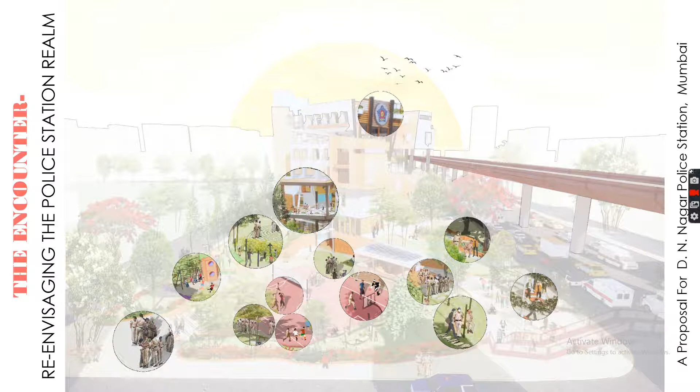The topic takes up this cause of the current plight of the police stations of our city, to study what it is and see possibilities of how it could be made better.

As for the police, we have all seen them. The question lies as to whether we've ever noticed them. They're doing duties in the scorching heat of the sun. They're managing festivals almost every year away from their families, which when we celebrate as holidays, they're patrolling around even through the night, all for our safety. And all of this happens for us, for the community, done invisibly.

The workspaces present for the police are very incompetent. Thoughtful design has the power to make a person feel respected and seen. Hence, the design of a police station can actually be a means to give back to the police for the effort they put in. It could be a means to take the police station forward from simply being a redundant space where they work from.

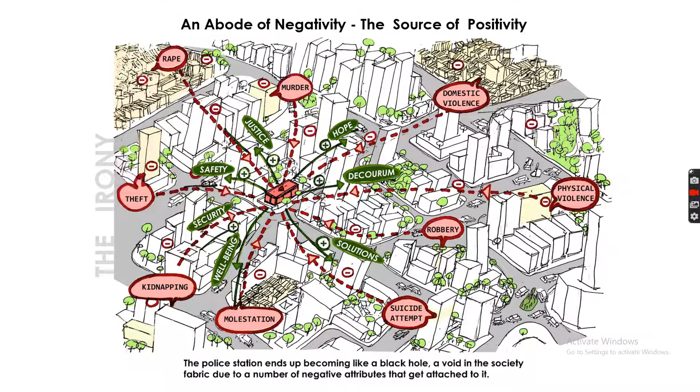The police station is the most important part of policing, as it is the intermediate between the police and the people. It is the formal connect. It is the personification of the police to the city. It becomes our go-to place during any times of negative happenings, be it theft, robbery, kidnapping, rape, etc. And in return, what the police do is give back to society in the form of hope, safety and security.

In this process of actually giving back positivity, the entire environment in and around the police station ends up having a very negative and critical vibe because of sights of despair, vulnerability, disturbing sights in the form of arguments and verbal duels, serious discussions, and the overall tense, silent atmosphere that exists there. It makes it quite ironic, as for a body which is supposed to be the symbol of positivity, it itself has an environment of this sort.

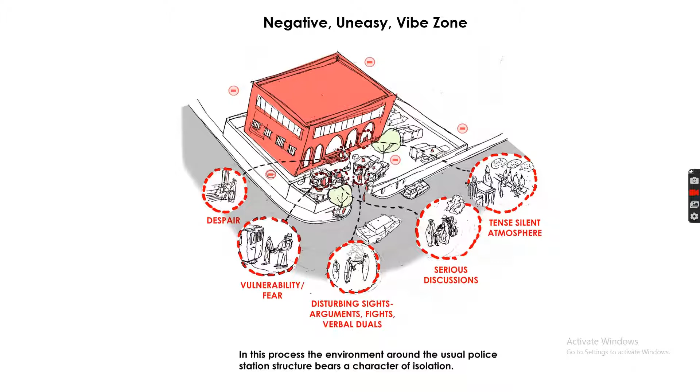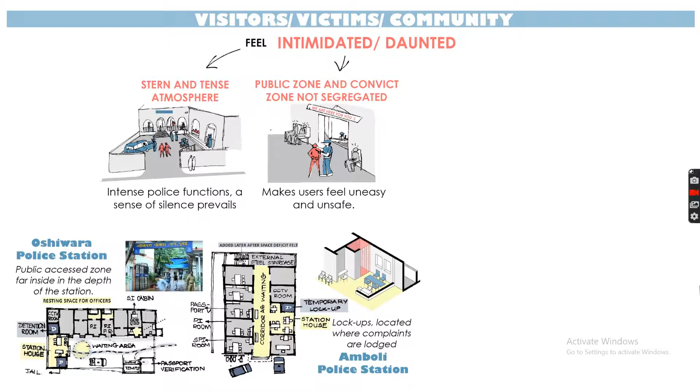The entire research was done studying the environment of a police station with respect to its two key users, the visitors and the police persons themselves. With respect to the visitors, it was observed how the stern and tense atmosphere, along with the non-segregation of public zones from convict zones, and even the visual opaqueness that most police stations had, made the entire experience of visiting the police station highly intimidating.

An example of this noticed in police stations would be the Oshiwara station, where the station house, the most public part of the station where complaints are lodged, was actually located deep into the depth of the police station, involving a person having to pass through serious functions, eventually leading to a space you call public in the midst of something very private.

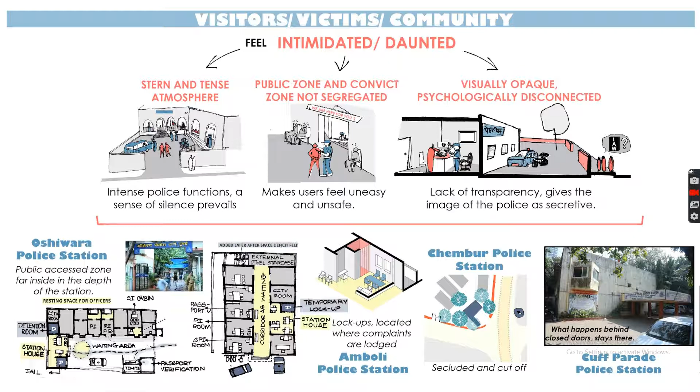Coming to Amboli police station, the station house itself had a lockup located for convicts, which made the entire vibe of the space very uncomfortable for a person coming in. With respect to Chembur police station, Cuff Parade police station, and almost every other police station in Mumbai, the debarring compound walls and blank facades make a person feel psychologically disconnected from the outside, creating discomfort and a feeling of unsafety.

With respect to the police, one undeniable aspect of their lifestyle is work stress. Mumbai police themselves have been found to have many officers falling prey to heart ailments because of the amount of stress, all of which comes down to the amount of crime they witness almost on a daily basis.

They interact with mentally unsound people and need counseling themselves most of the time. There is a lack of societal connect, predefined notions people have about the police, and too much work pressure, where the workforce is disproportionate to the people they cater to. There is unsatisfactory pay and sparse family time, all of which takes a toll on their health, and eventually the workspace doesn't compensate for it.

You have police stations like DN Nagar and Shivaji Nagar actually working from residential buildings. And it comes down to why—why are police stations in Mumbai existing the way they are like this?

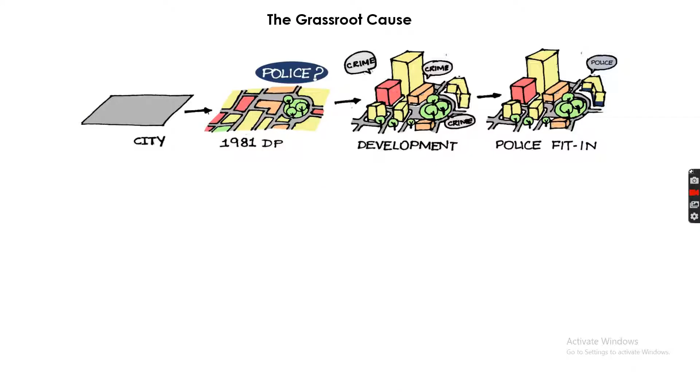The grassroots cause of this comes down to the entire development of our city over the years, especially the Development Plan of 1981, which did not strategically plan out police stations, resulting in police stations having to creep into the existing fabric once it was formed and fit in wherever space was available.

Even the aspect of slums being an undeniable part of Mumbai plays an important role. They became the birthplace of crime on the outskirts of the city, until our city grew around them. Now our slums are within the city, and they became an integral part of it, so the police now have to work to eradicate crime from a problem created years back. If the very formation of it could have been avoided, it could have been a great boon to reducing crime in the city.

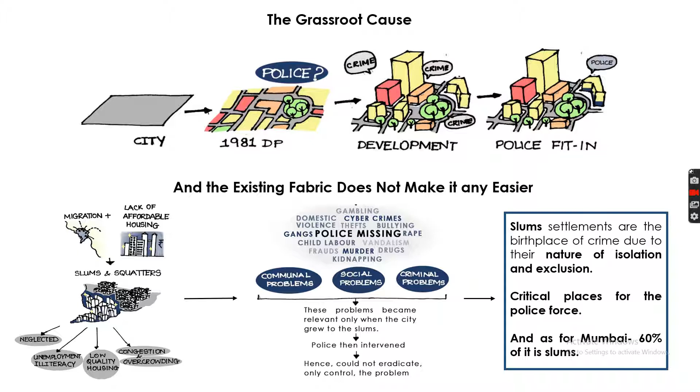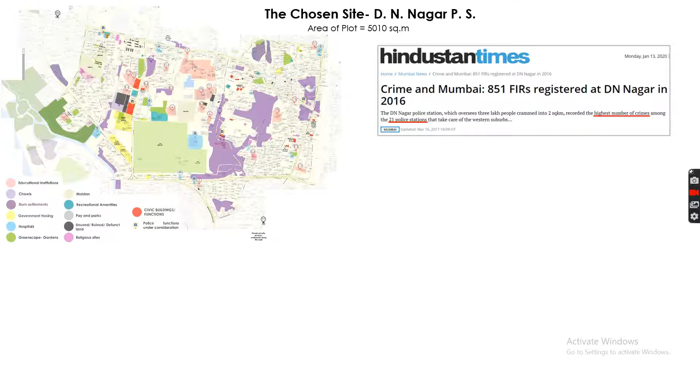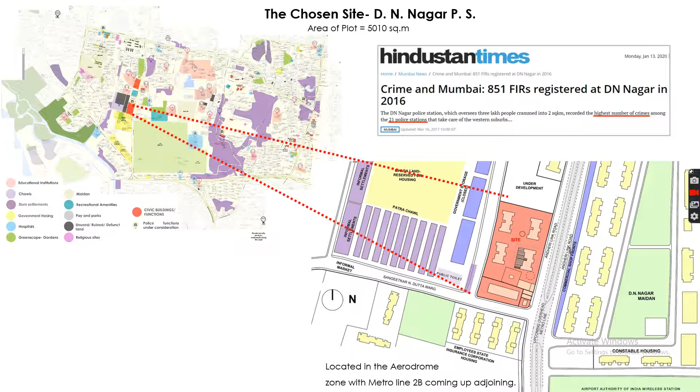So the site chosen for this is DN Nagar police station. It was recorded to have the highest crime rate in the western suburbs. The station is ideally located, with the Andheri link road adjoining it, connecting to two other main arterial roads on the north and south, which connects the entire precinct further. The entire zone around the police station is mainly residential.

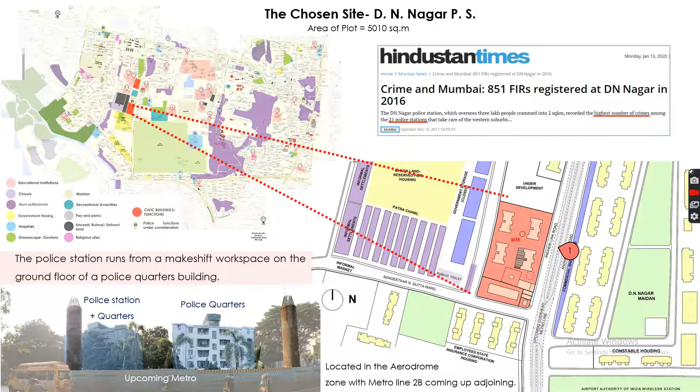The main reason for choosing this station as a site is the fact that it runs from the ground floor of the police quarters building. What results is that the police and the people living in the building share the same compound, the same building, and even the same circulation corridors.

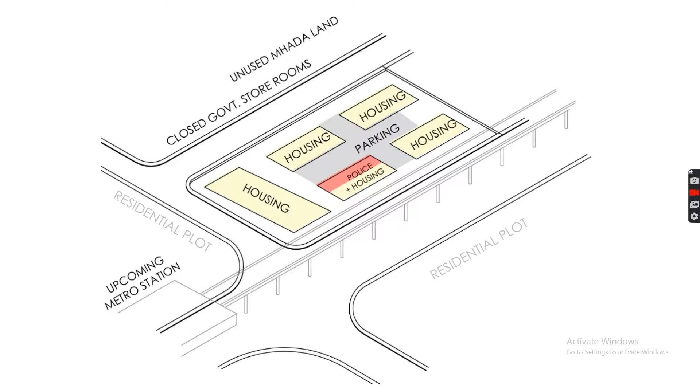There are insufficient spaces for working, and storage comes in wherever possible. All in all, the entire environment of the police station is very dull and mundane, again having an impact both on the police and the people coming in.

Hence, the main intent of the proposal is to meet the needs of the two key users—the people and the police. With respect to the police, it is to ensure better physical and mental health through the work environment, which will eventually result in better work output. With respect to the people, it is to make the entire precinct have an unintimidating vibe.

So now, a person coming in doesn't have to feel scared. This would eventually help better the trust equation between the people and the police, improve the rapport, and all of this together would lead to better policing. And better policing leads to nothing but a safer society.

A very important question which my thesis poses at this point is, what would a safe society be? Wouldn't it be where crime is low? And how can crime be low is the question. It would actually be when crime is eradicated rather than solved once it has been committed.

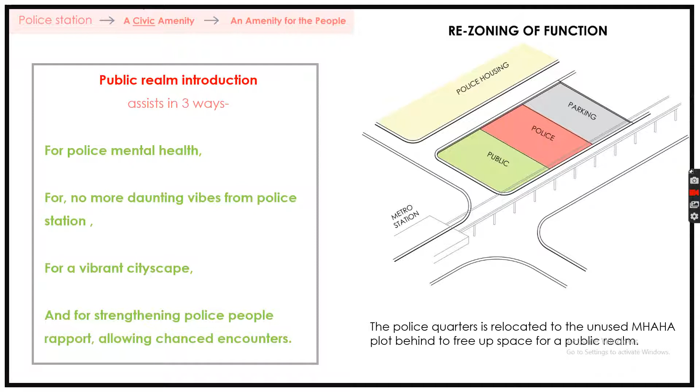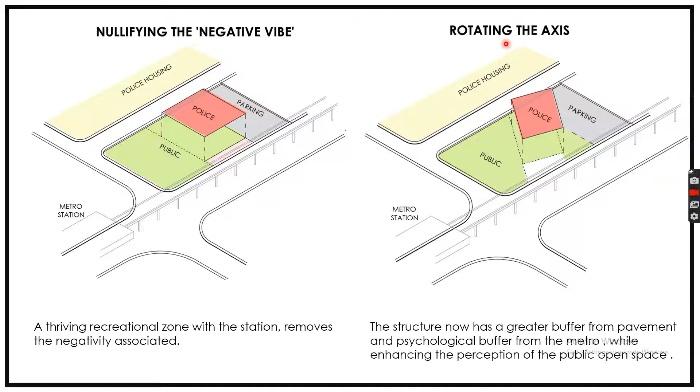The public realm now comes into the picture, where the entire emphasis on it is further increased by introducing this public realm which now goes further under the police station by raising the police station on stilts. You further have the entire axis of the police station rotated to give a physical buffer and mainly a psychological buffer from the upcoming metro station that's coming up.

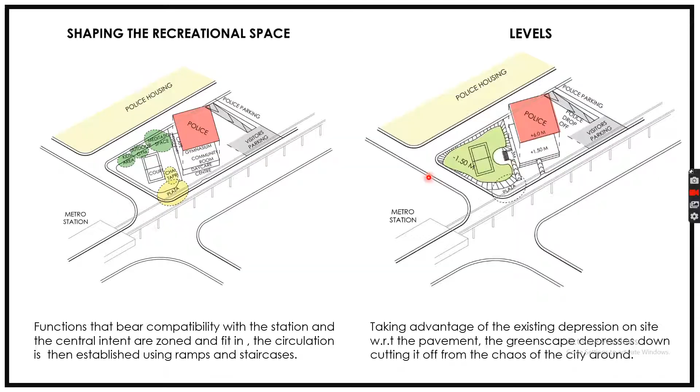Once you move ahead, the entire public realm is further detailed out, given character, and it is taken forward by taking advantage of the depression on site. There is an existing 0.9 to around 1 meter depression that exists on the site. With respect to this, the entire public realm now depresses down with respect to the pavement level, and you have these earth berms that come around it, which all in all make the entire public space a kind of safe haven, cut off from the chaos of the city, making it like a secluded zone within the same plot, a more secure zone in a way.

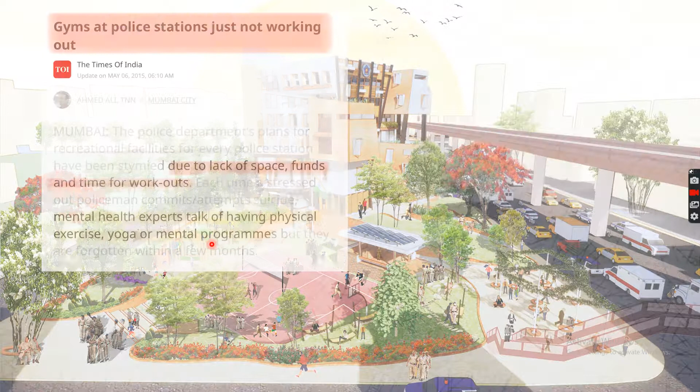The interventions on this outdoor realm include the outdoor gymnasium. The entire stance of having indoor gymnasiums in the police station was questioned, because lack of maintenance and funds meant the meaning of the police gym was lost over time, becoming a mundane space which police failed to use due to the ambience and lack of maintenance. Statistics show that out of 93 police stations, only 20 have gyms, and even those lack funds to maintain them.

So an outdoor public gymnasium that promotes physical activity becomes a very important insert, as it has zero running cost and almost zero installation cost compared to gymnasiums inside.

Another important insert introduced for the design was a chai tapri, where it was found that police often came down to take a break and discuss cases and work-related matters informally. The ambience overlooks this interesting public realm, with extensions in the form of charging points and newspaper stands, taking forward the idea of the chai tapri as a pause point.

You have informal seatings in the form of hammocks and earth berms coming in, based on research into how stress-busting the act of simply lying or being in nature can be.

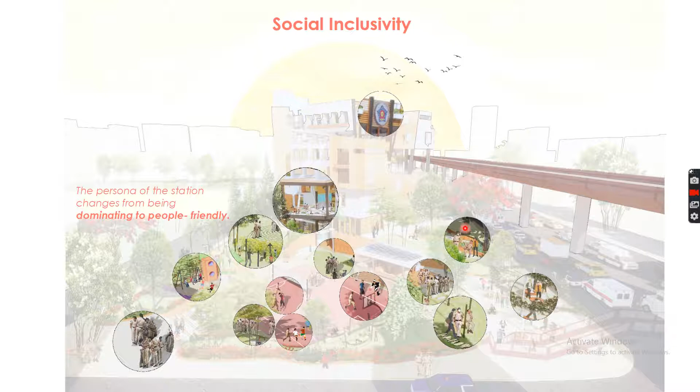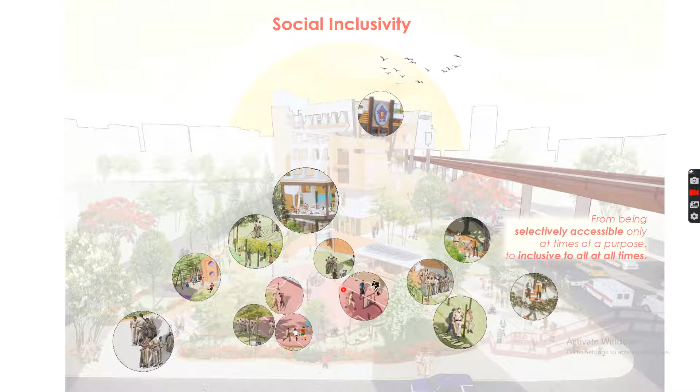The police station is now open to all classes of society and all age groups, and the environment around it becomes less intimidating for a person, removing the psychological connection of the police station being a negative space.

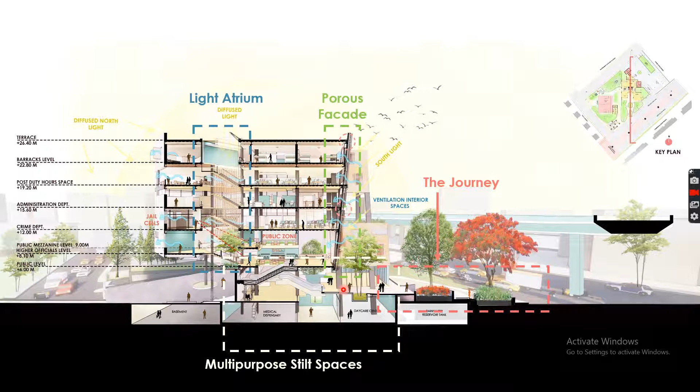Coming to the main built form of the police station, a number of design inserts have been thought of, where the entire stilt space has been imagined as a multi-purpose space with functions to better the community, furthering crime eradication. The entire journey has been curated for people who come to the station. With respect to the police station above, the light atrium and a porous facade are important design aspects, to be discussed further.

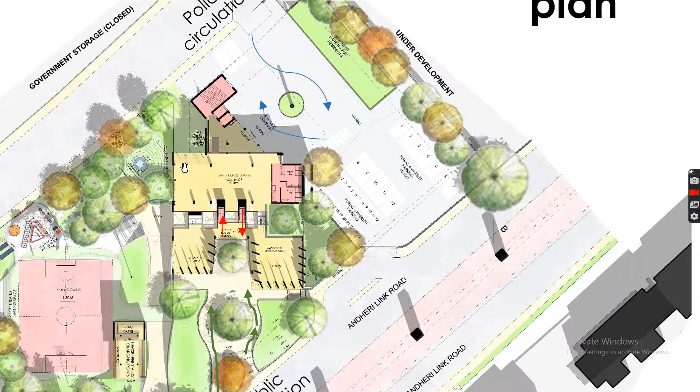Coming to the main circulation patterns worked out: there's a separate police circulation zone behind the site, with independent drop-off, so convicts and VIPs could be brought in without hampering the public circulation happening otherwise.

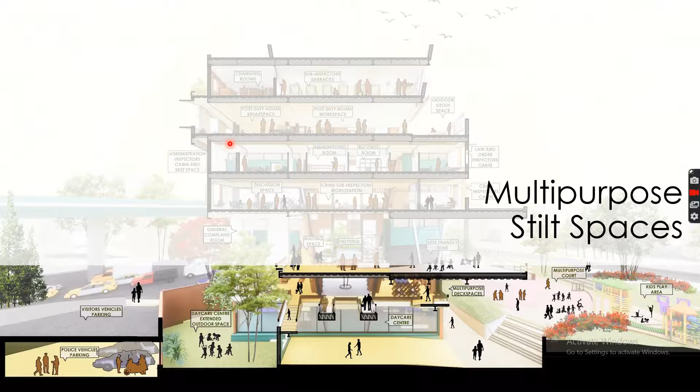You have public parking and the basement for police parking being worked out. Apart from that, the entire stilt space now becomes this kind of free zone which a person would pass while coming to the station.

What this has been envisaged to be is this kind of multi-purpose space where you would have temporary functions in the form of community meetings happening, and the police coming and interacting with the community about issues relating to the community.

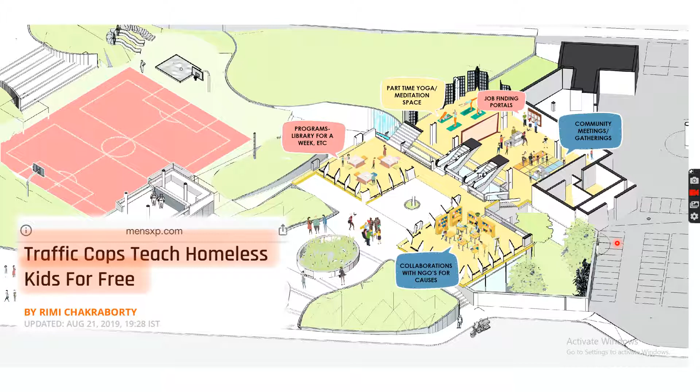You have awareness drives that can take place, schooling for the homeless that could take place on a more permanent basis, aspects of job finding portals that could come in, and other public service drives and camps to organize press conferences could now be used.

So now this kind of public realm extends the idea of police stations being just for lodging complaints, but takes it forward to get rid of the entire aspect of where crime starts from, becoming a more positive insert. It could now have a space to engage with the youth, with the community.

The mohalla committees that exist, this becomes a space for them to have meetings more seriously. It gives a space to the community in the police station. It makes them feel important.

Aspects of night schooling could be brought in as more permanent functions, where the police station now becomes activated even at night. So for people coming to police stations at night, they don't have to feel scared at all.

Apart from that, other permanent functions in the form of old age homes, daycare centers, medical dispensaries, welfare centers, workspaces for NGOs, which all show compatibility with the police station, could all be inserted.

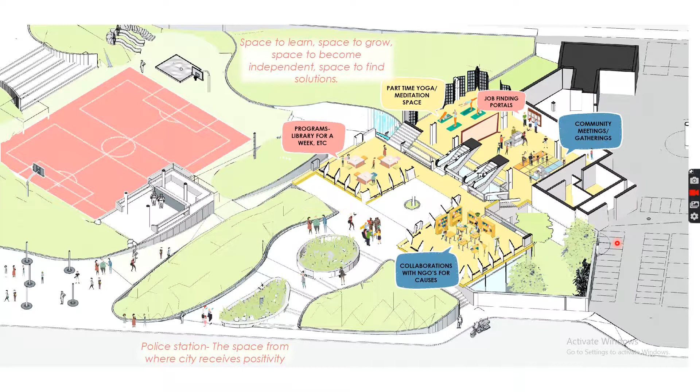So now what the police station becomes is a space to learn, grow, become independent, and find solutions. It becomes a true source of positivity and radiating positivity out in the society in every sense.

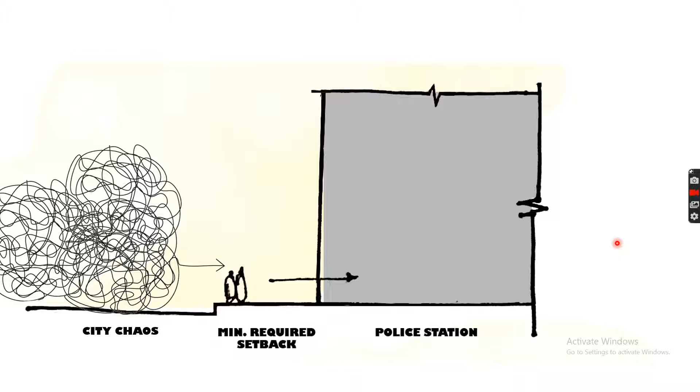Coming to the main working zones and the entire circulation for a person visiting the police station, the entire journey has been curated keeping in mind the kind of mental baggage people come with. Most of the time people that come are victims and have a lot of mental trauma. So the entire aspect of entering the police station has been thought of as being like entering a garden.

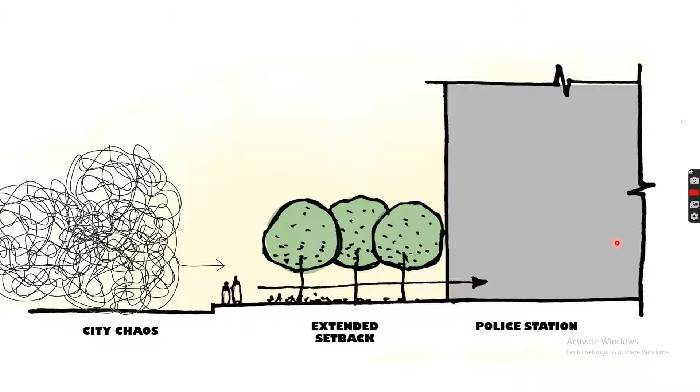You have this extended setback being created where a person is actually feeling himself getting cut off from the chaos of the city. There is an elevated pathway which is further emphasizing this cut-off aspect, cutting out the city chaos and entering this new zone where they can finally find hope.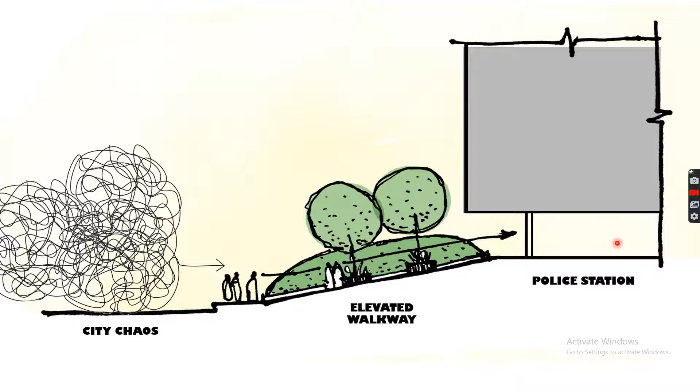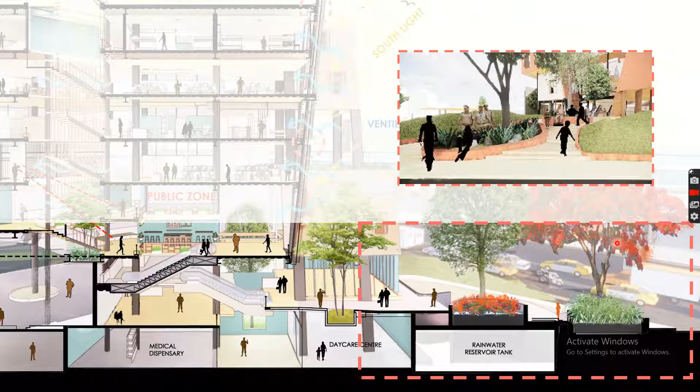The plinths also at the entrance have been made at seating level, which again takes forward the observation that people coming to the police station come with big families to lodge complaints, and to talk and discuss the issue after that. This gives an extended space to them to use this kind of space in the police station more meaningfully.

Coming to the introduction of escalators, the entire therapeutic walk that was first thought of is further continued in the form of the escalators, so as not to break the entire journey.

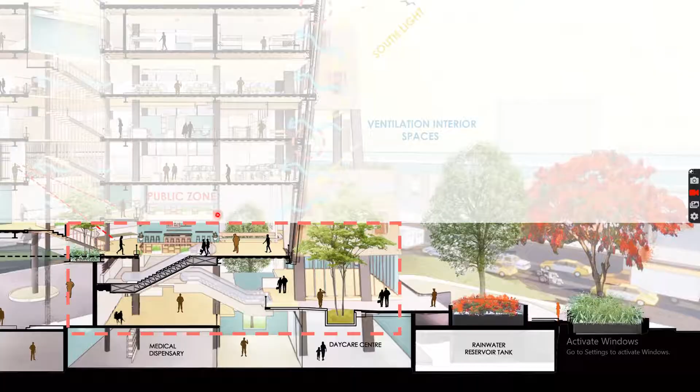A person arrives at the police station finally at the 6 meter level, after which the entire zoning gets broken down according to the different requirements.

The entire mass of the police station is further broken down to insert a break in the middle of the big monotonous mass. The entire aspect of porosity was always known in the design and was hence inserted in the form where this cutout is made in the built form to have this kind of porous facade coming in.

This entire space becomes a very sensitive space for me in the design, where it was symbolic of how the police would actually be protecting the people. It's very symbolic of that, the way the tree protects this kind of space over here where the tree comes up. It was taken forward to make more drama out of the form, where it was given this angle, and you had light coming in and filtering down through the tree.

Once a person reaches this zone, there is this conscious change in zone, a change in space that happens, which gets a person to feel like yes, they are actually being protected by the police.

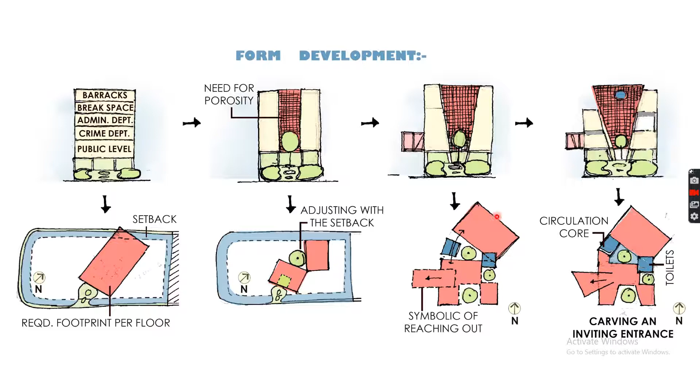Again, the service cores and the toilets and all were added to finally achieve functionality in the entire police station. The entire work zone breakdown happens in a manner where you have the public realm coming in, given a double-heighted effect to make it more welcoming.

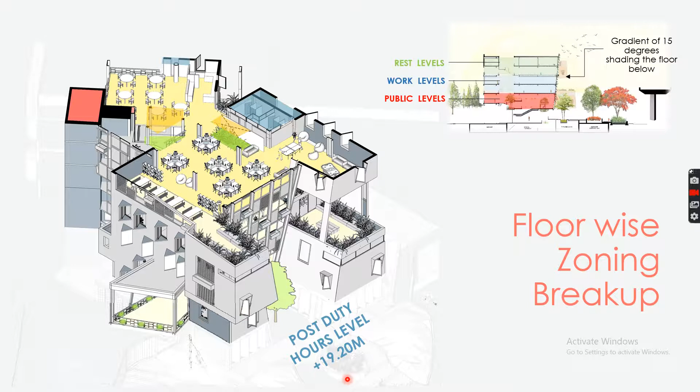You have the crime level, which are the work levels, the crime and admin level coming in as the work levels, and the rest levels coming in as the post duty hours level and the barracks level.

Moving on, the entire light atrium connects the entire police station's length and breadth. This not only allows natural light to come in, but also visually and acoustically connects the entire station together, making it easy for visitors to comprehend the entire station at once, which otherwise became difficult in any other police station.

It's like what happened behind those closed doors stayed behind those closed doors most of the time. So there's a sense of superficial transparency that exists, and it removes the daunting effect of being in a place where you don't know what's happening beyond that.

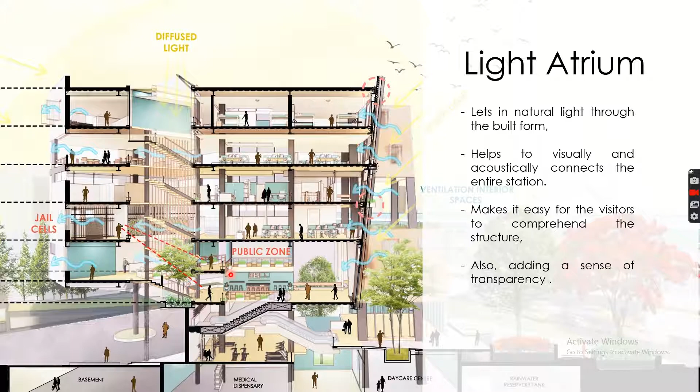This partial visual connect between the jail cells and public zones was done in an attempt to remove the aspect of police-related violence, to be a little debarring for the police inspectors too, to carry forward those activities, along with this acoustical connect that exists.

Moving on to explaining each floor in detail, you have the public level having the waiting space centrally located, the help desk located with all the other station houses, and the passport verification center located, along with interventions seen in other parts of India, like in Coimbatore.

Where there were zones sensitive to kids and women, that was taken forward as a very vital insert, where you have a separate women's zone to take down complaints. You have this zone reaching into the public realm, zoned for kids to help them feel psychologically connected with the outside, to know where they are, and hence have a zone which is comforting for them.

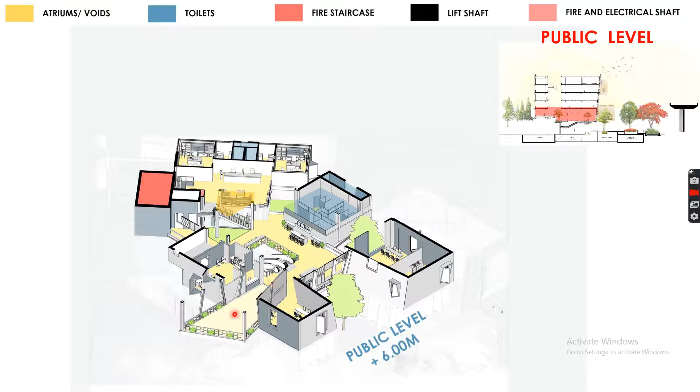All in all, you have this visual hierarchy given to the higher inspectors, the public relation officers, and the senior inspectors in the form of this entire mezzanine that's created. Eventually you have this in the form of the split that is there.

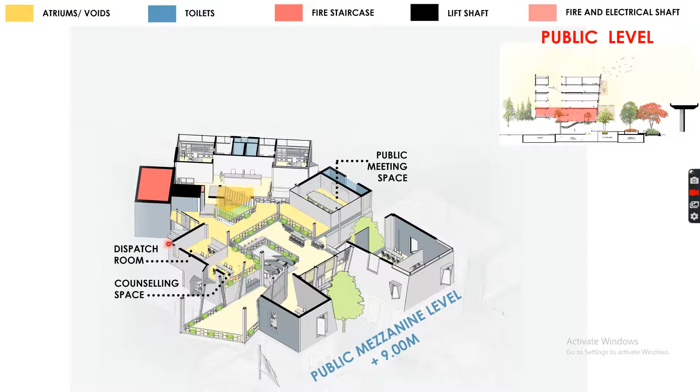You eventually have the mezzanine coming in, with other functions in the form of the public meeting space, which would be very useful for when the DCP and the ACP come in for weekly visits to supervise the happenings of the police station. You also have other technical requirements of the police station in the form of the dispatch room, the public counseling room, etc. So this is the entire public level of the police station.

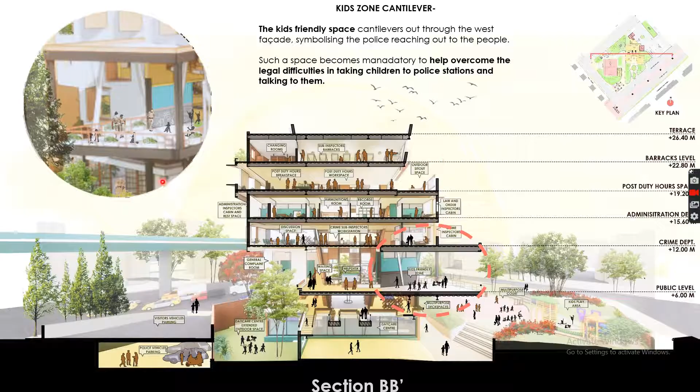Taking forward the kids zone, the entire psychology of the kid was studied to understand how important it is for them to feel secure by being connected with the outside. So the details have been worked out so that the entire kids zone would be cantilevering out with the help of a truss.

The idea of the truss is also tweaked, where instead of having vertical members, it's tweaked to match the angle of the front facade and have counterbalancing cables coming in. The details have been worked out as follows.

Apart from that, you have the entire crime level coming in with the crime inspector at its apex, as the apex invigilator of the entire floor. You have flexibility in the workspace, where for the entire force you have desk-related job space, and space for carrying out discussions and an outdoor break space.

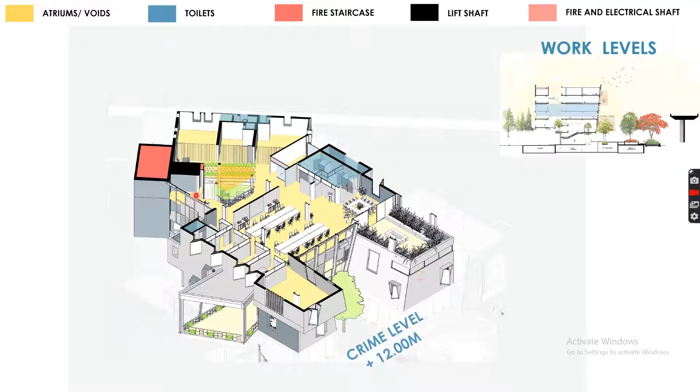The entire jail cells have been zoned separately for females and males. As for the juvenile detention space, it has been reimagined as not really being a detention cell. Since they are juveniles, there is way more scope to refurbish the aspect of removing them from the crime equation by proposing it as a library.

So the entire space where the juveniles could now be kept would be in a space which promotes education, which promotes learning.

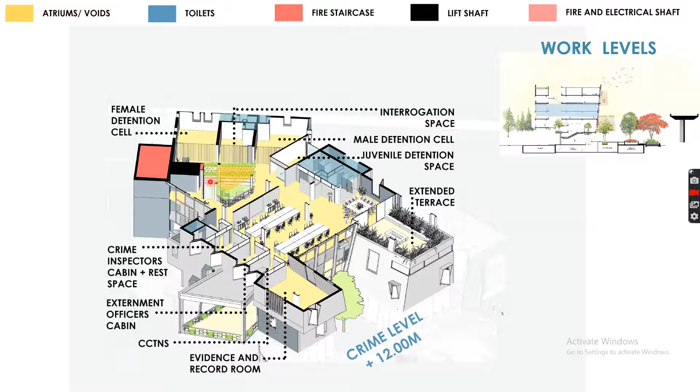Apart from that, as you move forward, you have the admin level coming up. Again, very technical spaces, very technically planned, where you had all the space requirements in the form of different functions. The admin level inspector and the law and order level inspector become the head of the floor.

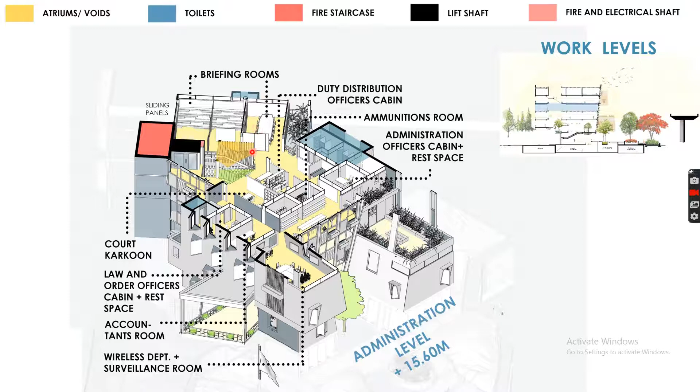Briefing rooms become a very important part, where for the daily rosters given out to the inspectors, you have this meeting space being flexible to carry out discussions with big groups for planning out, say, festivals, and how the entire planning would have to happen when VIPs come in.

All of that could happen on this floor. Here is a closer look into the activities, where you have the ammunitions room and the record rooms, which come under the admin inspector. Then you have the law and order inspector taking care of the entire surveillance of the area in terms of festival management, etc.

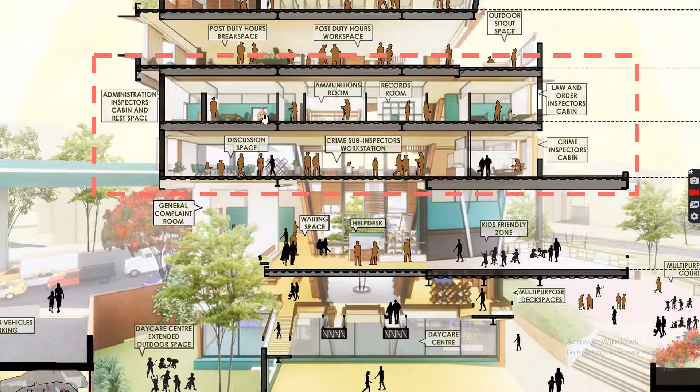With respect to the crime level, you have the discussion space and the open desk space, with a lot of light coming in from the entire porous facade that has been proposed.

Moving forward to the rest levels of the police station, you have the post-duty hours workstation, where the police inspectors could actually come and finish their work post duty hours, which I actually observed they didn't have space for most of the time. There is also an extended workspace and indoor game zone for them to de-stress.

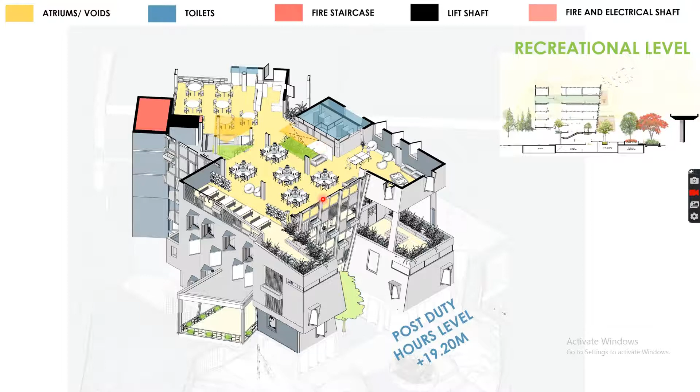You have a dining space for them to actually come and have their lunch. So there are zones now segregated for different functions which are otherwise not present in most police stations. Finally, the barracks level is provided for both men and women separately, according to the workforce requirement and the norms present in the entire police station designing code.

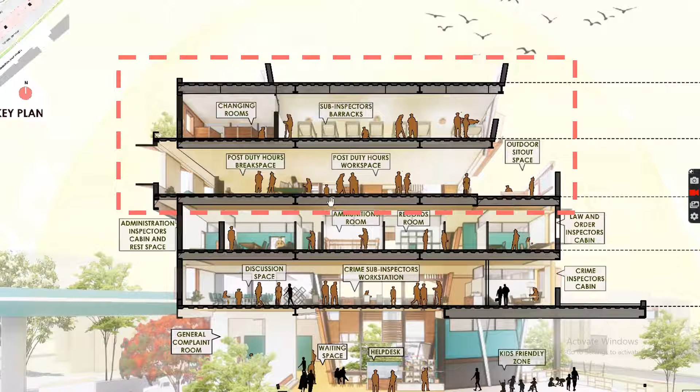This is a closer look into the spaces where the outdoor sit-out, the post-duty hours break space, and changing rooms are present, from the barracks level.

Coming forward to the detailing of the porous facade, it was tried to be made more haphazard and interesting rather than repetitive. So you have these units of a flower bed, louvers, glass members, etc. coming in, haphazardly placed and attached to the entire slabs of the structure through these kinds of joineries, where the steel member gets attached to the vertical member.

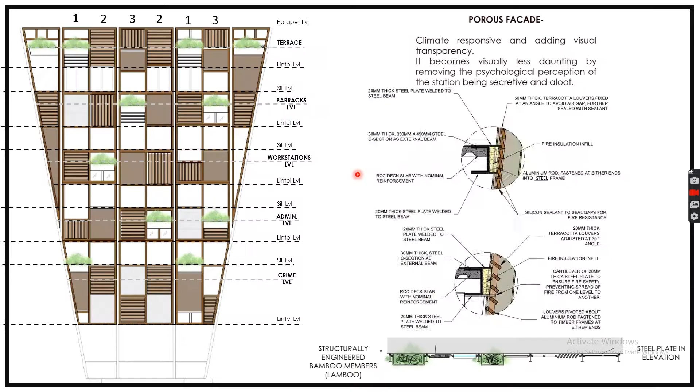This is taken forward. There is a slight inclination which happens, where it kind of tapers outwards, which would be noticed in the section view - it's tapering outwards to add more dynamics to the form.

The entire material palette chosen is meant to represent the khaki-clothed attire of the police inspector, where khaki stands for the indigenous force they are, the rooted and grounded force they are, and hence the material used is also very earthy. There is terracotta used on walls along with white, which stands for purity, creating a material palette that makes the entire look very grounded and earthy, and provides a kind of dignity to the police force. It represents them in a light which, personally as an architect, I feel is something that is required.

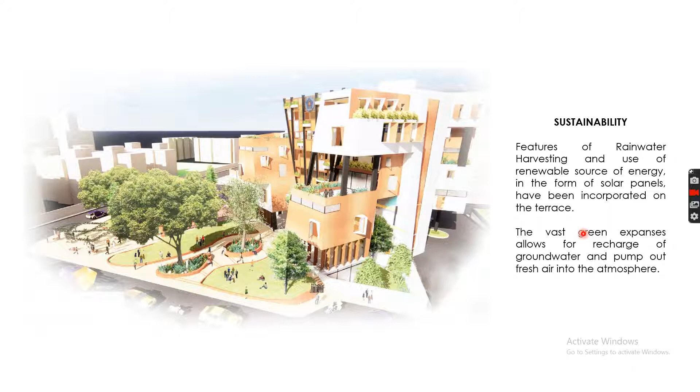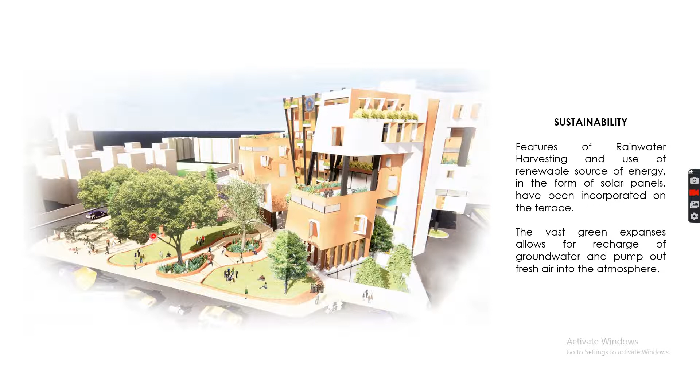Other aspects of sustainability have been provided in the form of rainwater harvesting, where the green space provided becomes 100% on Mother Earth and becomes 100% percolating ground. You have solar energy being used for supplying most of the power requirements of the entire station. The entire green lung all in all becomes a very vibrant, psychologically comforting zone, and provides a lot of oxygen, which I'm guessing is something a city requires because of the amount of pollution there is.

So in conclusion, what I would like to say is this proposal not only looks at providing for the police and providing for the people in terms of space requirement - I think a major part of my thesis mainly focuses on providing for the policing. It really wanted to look at ways where the community could be made safer at large and happier.

That undeniably goes down to the grassroots causes of what makes the community what it is today. Crime and such creep in from right where poverty starts, where lack of education and lack of basic means to livelihood start, and as a community, if we care about that along with the police, together we can make the entire city, the entire community, a much happier place.

We are in a city where a community is not just one religion or one type of nationality. It is about totality - about everybody existing together as one, as humankind. So that is where the entire ground stands.

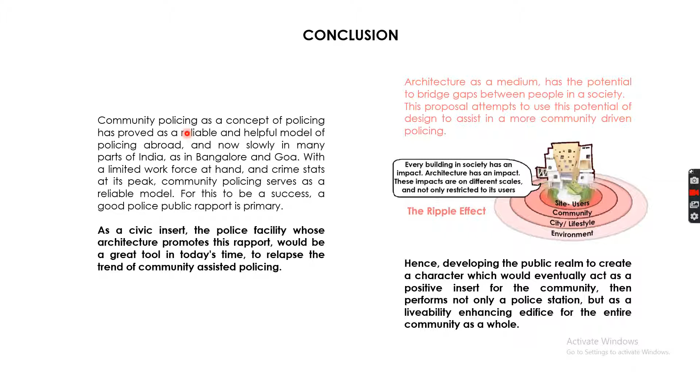I have mentioned here how community policing is something our police force is also striving for today. Bangalore and Goa in India are among the first few cities to take up this cause of community policing, and efforts are being seen. Taking forward that concern shown by them would all in all help make our country a much better, more livable place.

I'll just run through the entire ARD report and what all has been thought with respect to that.

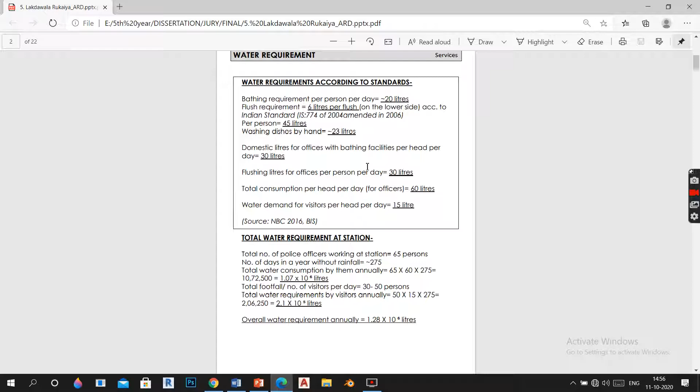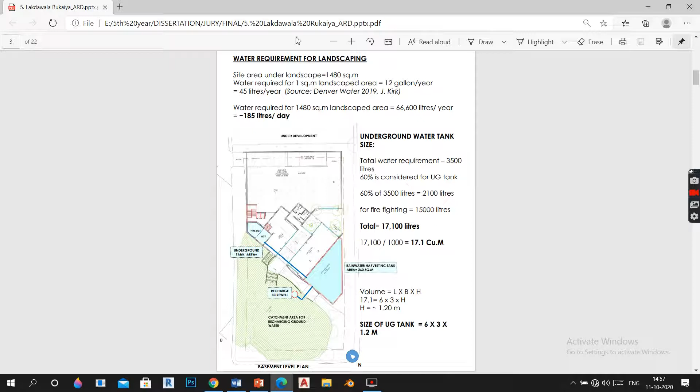You have the entire water requirement calculated according to standard norms, finding the total water requirement of the station with respect to the number of people using it. You have the underground tank provisioned in the basement level, along with the fire tank, with all requirements met. The landscape requirement has also been found out.

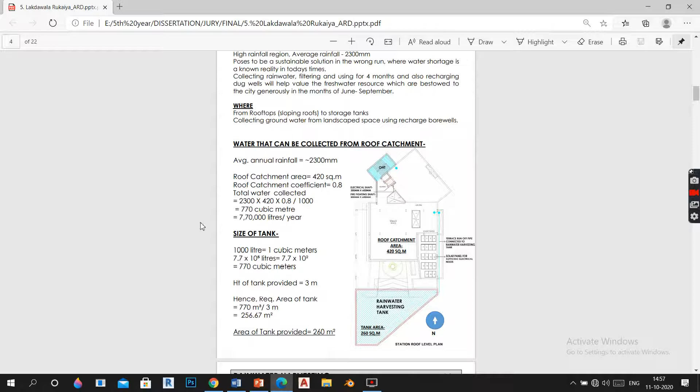All of this comes down to finding out to what extent rainwater harvesting can suffice the need of water. The rainwater harvesting tank has been placed under the earth berm located at the entrance while a person walks up to the station. It has been zoned over there. The amount of water that would be collected has been calculated to decide the size of the tank required. The entire green lung becomes a space to percolate and retrieve back the water through the recharge bore well located next to the rainwater harvesting tank throughout the year.

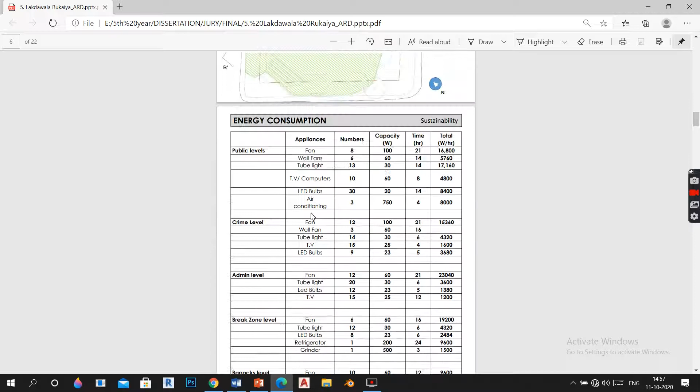With respect to energy consumption on each level, a rough estimate has been brought down as to what the total requirement would be, and accordingly the per day energy consumption has been calculated to find out the number of panels required, considering that one solar panel would generate 325 watts of electricity.

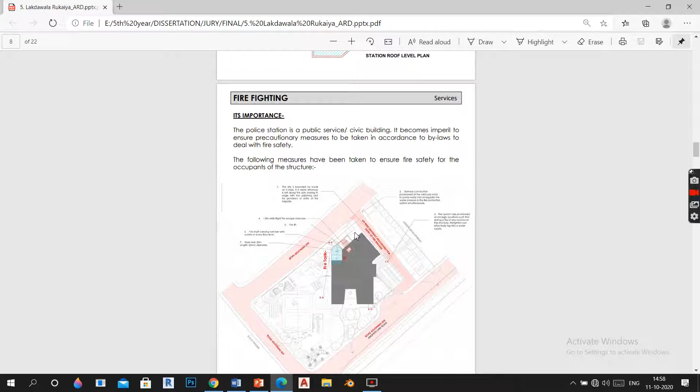Apart from that, being a public body, firefighting becomes one of the most important aspects to consider, and all those provisions have been met according to fire norms. You have the entire public level, the sprinkler layout laid out, along with the hose reel and how that could reach every part of the police station. You have the fire duct and electrical duct running along the entire shear wall of the lift, taking it through the entire building.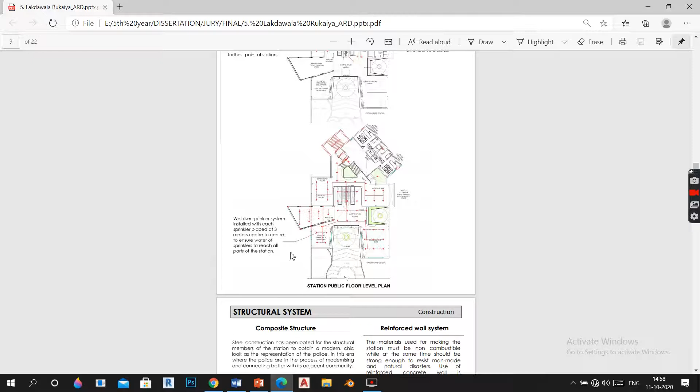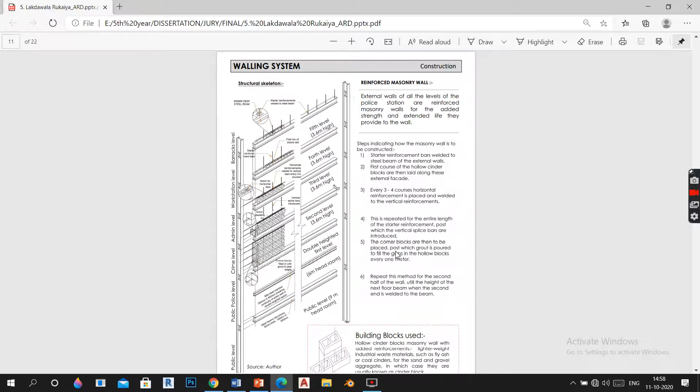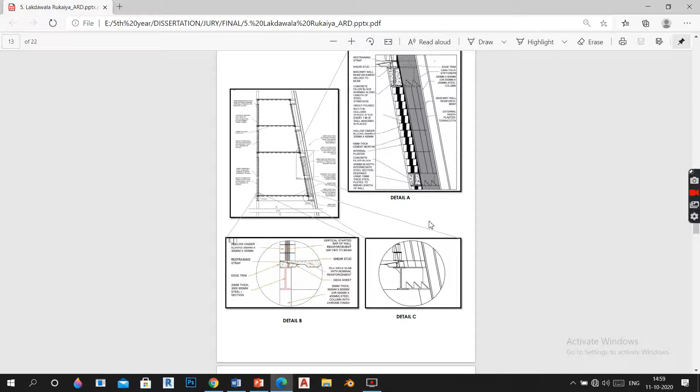With respect to the structural system, the material palette of steel has been used. A composite structure with steel and RCC has been used, where the entire walling system becomes reinforced masonry wall, again for considering the requirement of basic strength and to meet the requirement of the diagonal wall. The detail has been worked out with the reinforcement running and building blocks coming in, building the diagonal wall, finally laid with plaster for a clean finish. Customized steel members are used for the entire diagonal to achieve this seamless finish.

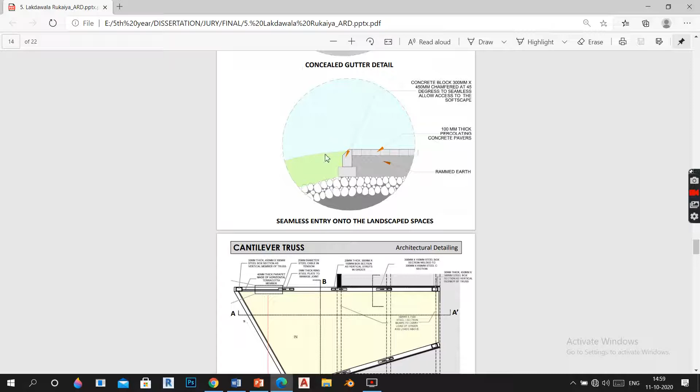Landscape details show the rainwater gutter happening more seamlessly, more invisibly, not coming in as a very visual aspect. Again, the transition from the pavement to the entire berm has been made more inviting, where there is no break, so it becomes more inviting for a person to enter.

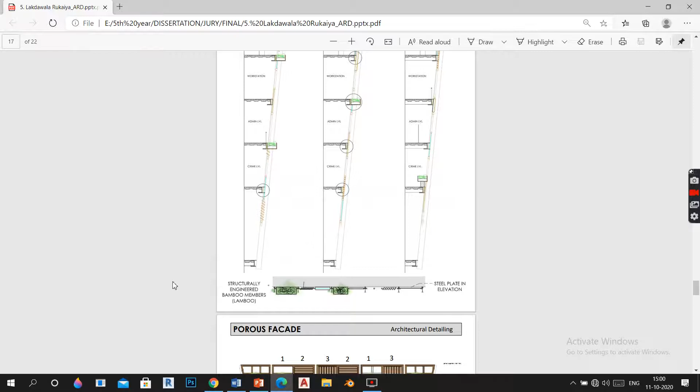The entire cantilever truss and how the angle has been worked out to match the entire geometry followed for the structure. These are a few details regarding that. The angle followed for the front facade of the station, the porous facade, has been given this angle to self-shade the floors beneath and bring a dynamic quality to the form.

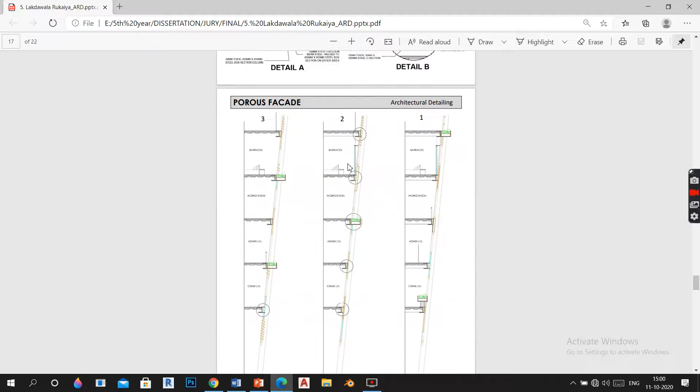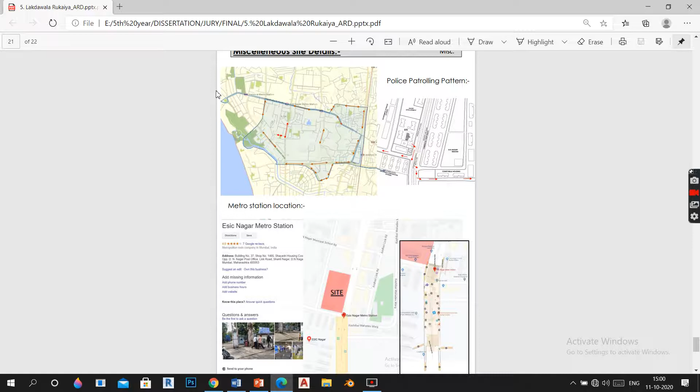These are a few additional analyses carried out during the research phase for the site, where patrolling was managed and the location of the metro station was very vividly plotted, which comes very close to the site. Hence the proposal of connecting the metro station to the site has been proposed as an additional thought of how inclusive and livable a city can get, so that even for people coming to or leaving the metro, the experience could be curated as something more, a pause in the plaza.

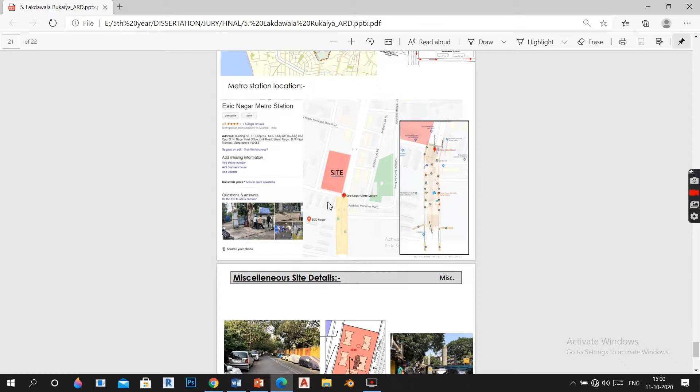These are a few other images which portray the entire scenario of the police station right now. I think I'd like to conclude here. Thank you so much.